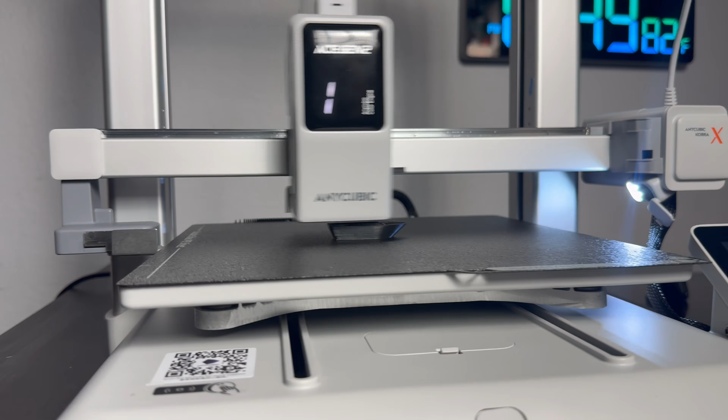A Benchy in 13 minutes, 4-color printing with half the waste and time purging filament, all without an external multicolor system. This printer isn't your ordinary 4-color bed slinger.

This is Anycubic's newest printer, the Kobra X. This printer packs a lot of new features in their new toolhead, the Ace Gen 2.

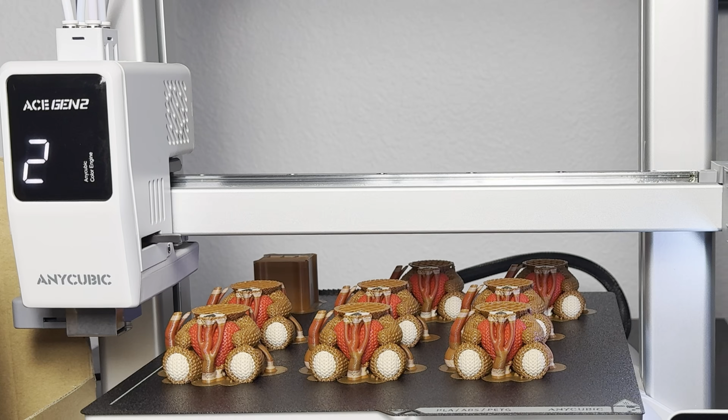Now let's take a look at the features. The big one is the Ace Gen 2 filament changer. Instead of the need for an additional unit for multicolor printing taking up more space in your work area, it's actually built right into the toolhead.

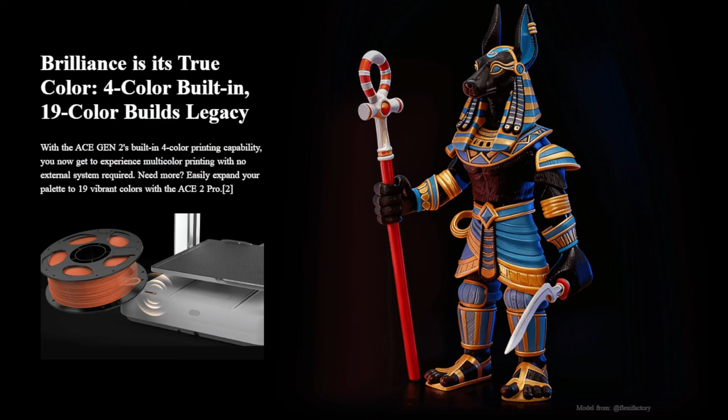Up to 4 filament spools are mounted right on the top here, and it's possible to get up to 19 colors if you connect 4 additional Ace 2 Pros. I don't know if anybody really needs 19 colors, but it's nice to know it's possible.

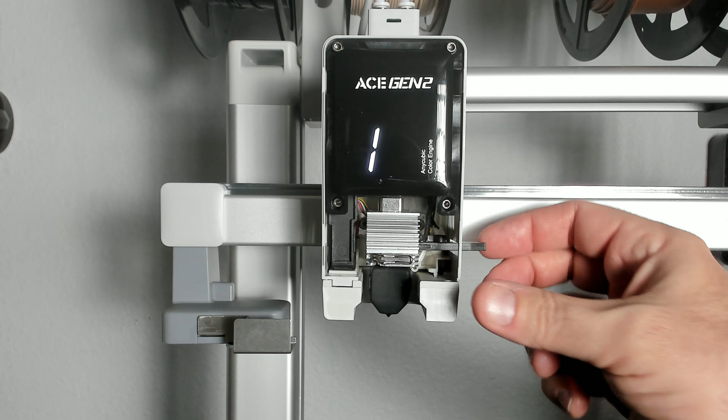Another feature in this toolhead is the short distance between the cutter and the end of the nozzle, only 35 millimeters. Because of this, Anycubic claims there is half the filament waste and half the time for color changes. So I will be testing that compared to my other printers.

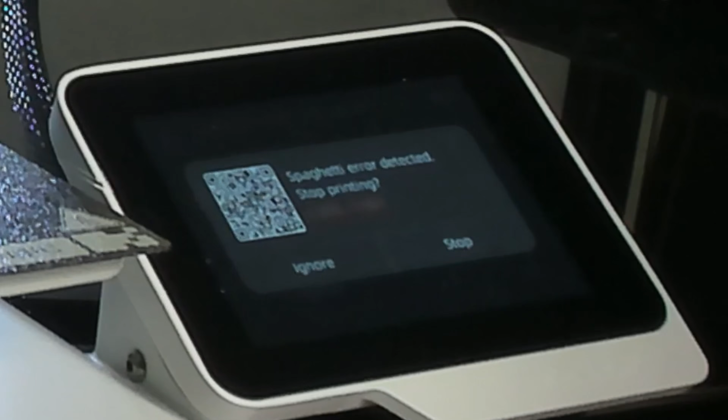The build volume is 260 by 260 by 260 millimeters, so it's slightly bigger than its competitors. It has a top print speed of 600 millimeters a second and a default speed of 300 millimeters a second. You can even print TPU and PLA together in one print. AI error detection with a built-in 720p camera, a quick change nozzle.

This is a whole lot more than I got when I first started 3D printing. Plus, this is for a printer that's under $400. I think it's time to put it together and try it out.

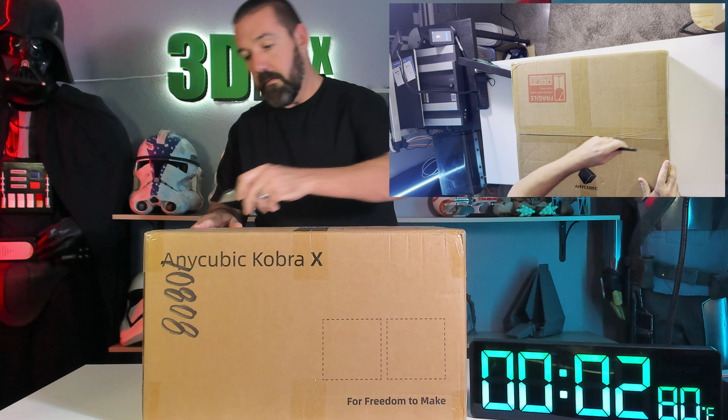I wanted to see how long it really takes to unbox and set up this printer, so I just set up a timer and 2 cameras and got to work. I removed the foam and zip ties from the base and frame. This frame is really easy to install since the 8 screws screw in from the top.

To move the Z-axis, you need to remove the screws and locks on each side of the frame. Then just move the belt under the top of the frame to move the Z-axis up or down.

Next, I tilt the printer and open the cover at the bottom to plug in all the wires. I did end up missing one end of a plug for the Z-axis, so I had to plug it in later. Next is the spool holders.

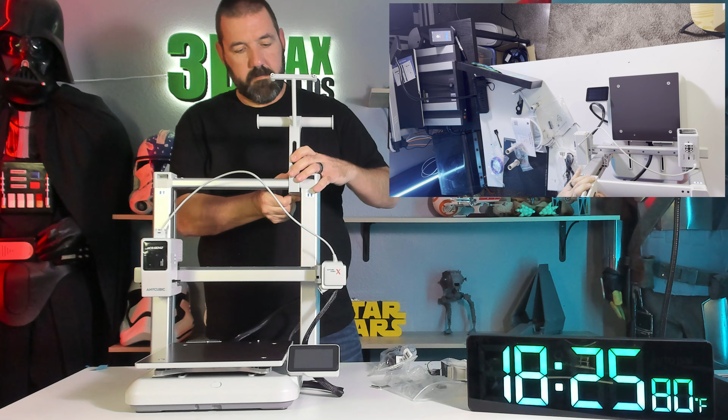I put them together and install them at the top of the frame. They are labeled 1 through 4, so make sure you install them on the correct side. Then I installed the filament tubes. Last, I attached the purge wiper and the print plate.

Overall, it was easy to put together, and it took about 22 minutes to unbox and assemble.

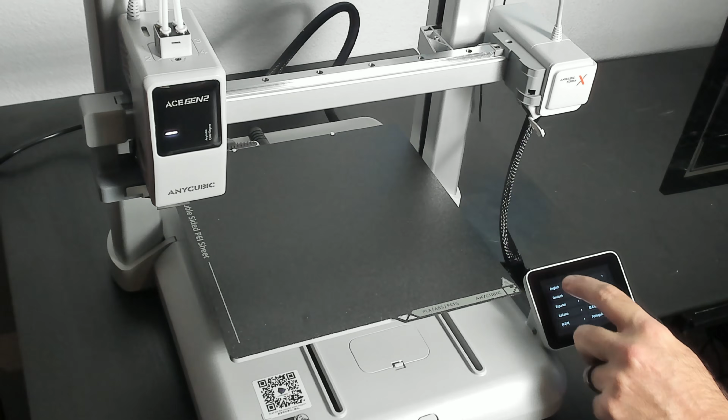After assembling, you want to get the Anycubic app on your phone and the Anycubic slicer on your computer. Then start the initial setup. This process includes calibrating the vibration compensation.

Other printers just test the vibration with the printhead in one position, but this printer tests the vibration with the printhead moving left and right, and with the print bed moving back and forth.

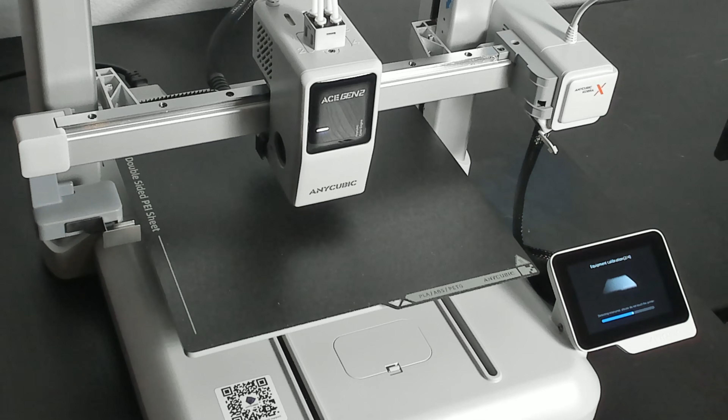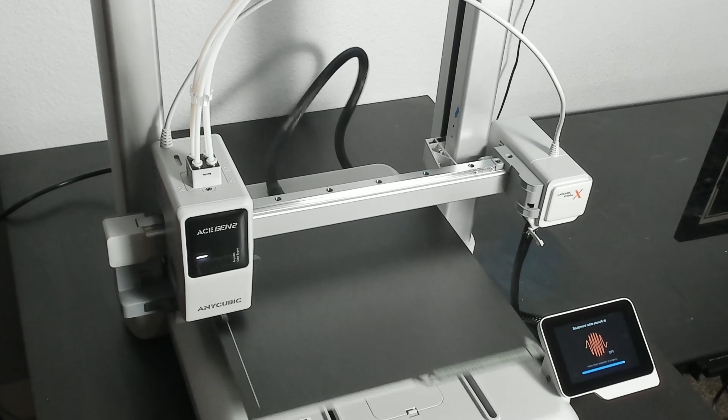It also calibrates for active noise cancellation. It tests the printhead moving left and right at multiple speeds, and the same thing for the print bed. Anycubic states that this printer operates at 48 decibels, so I'll be sure to test that out during one of the prints later in this video.

Now that the setup's complete, I'll go ahead and load some filament for the first print. Just feed the filament through the tube until you hear the notification sound. There are a few files in your printer to get you started.

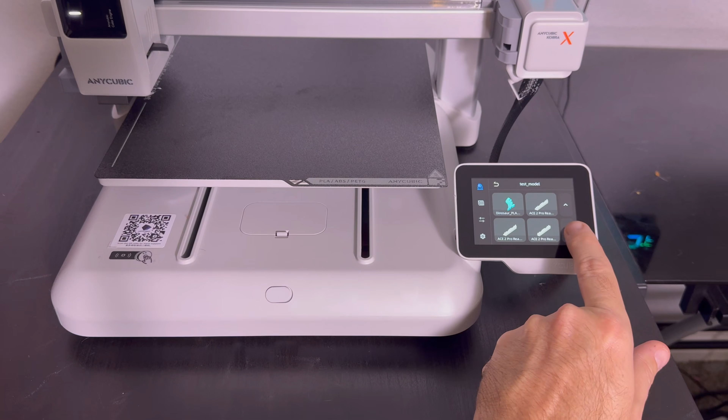One is a first layer print test. Let's try that out first. It prints just one layer over the entire print bed. I have to say that this looks really good.

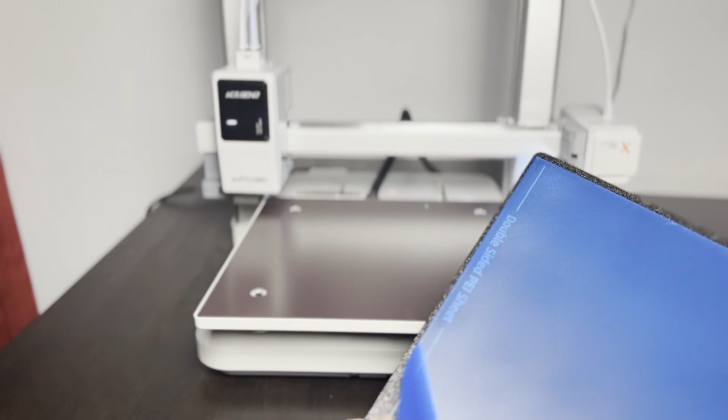I know I wouldn't get anywhere near this quality with the first printer I started with, especially since I had to level it manually. Okay, now let's test the 14-minute Benchy.

When I was testing the Kobra 3 Max, I think it was a 17 or 18-minute Benchy. Well, this one actually finished in just over 13 minutes.

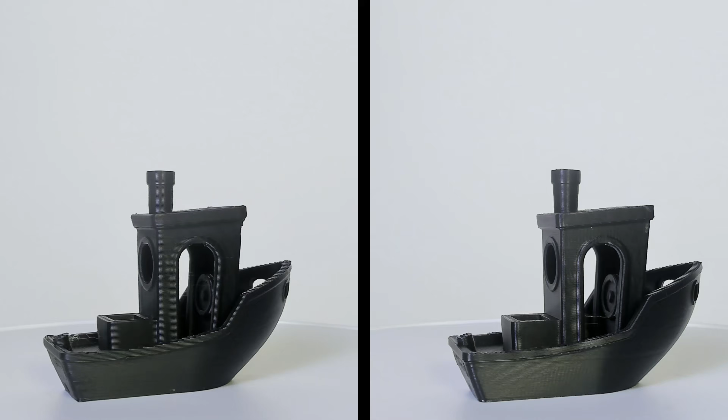I also printed the 40-minute higher quality Benchy. Here you can see the comparison of the two. There is a little bit of stringing and there is a difference in quality, but for just over 13 minutes, I'm actually more impressed with this one.

For printing TPU and PLA together, you need to use the right TPU, which is 68D. I only have TPU 95A.

I wasn't able to get any 68D in time for this video, so that's one feature I wasn't able to test. So now I want to find a 4-color model so I can test out the Ace Gen 2 filament system.

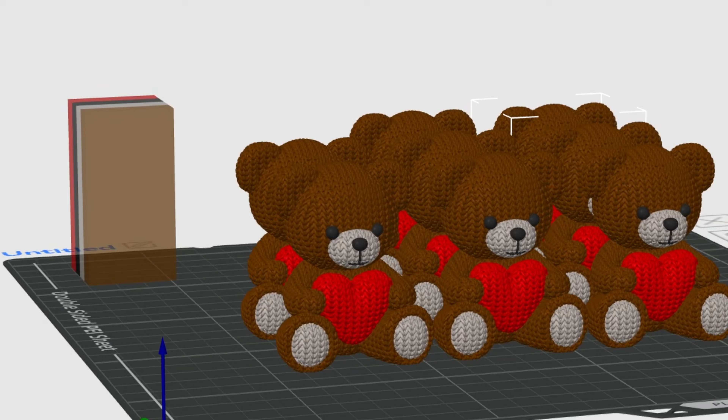I printed these bears at my daughter's request. She wanted them to give out to her friends for Valentine's Day, so that worked out perfectly. I set up the print for 8 bears, added supports, and sliced it.

There will be 308 filament changes. That comes to 3.5 hours for filament purge time, plus 20 hours for the model, which comes to about 24 hours of total time for this print.

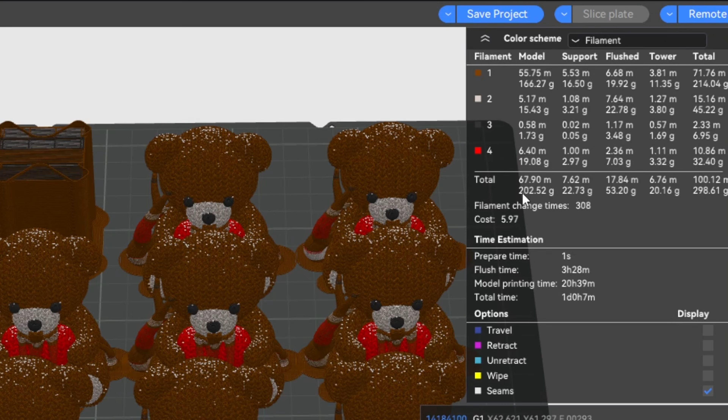For the material, it's about 200 grams for the models, 23 grams for the supports. These amounts would be the same as any other printer, but then you have the purge waste at 53 grams and the prime tower at 20 grams. Overall material is 300 grams for these 8 bears.

I go ahead and start the print. It's about halfway through the print, and so far so good. Now I want to take a look at how long it takes for a filament change.

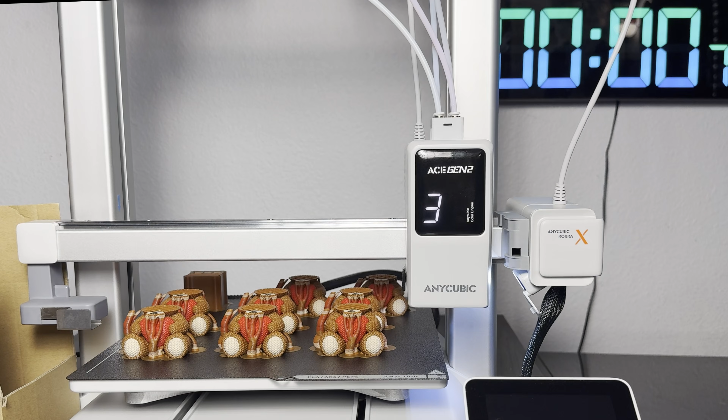With the material change all happening within the toolhead, it saves time since the filament only retracts 30 millimeters as opposed to 160 millimeters on the Kobra 3 toolhead. Plus, with the 35 millimeter distance between the center and the nozzle tip, it cuts down on both material and time to purge. Not including the prime tower, it took 55 seconds to purge and change the filaments.

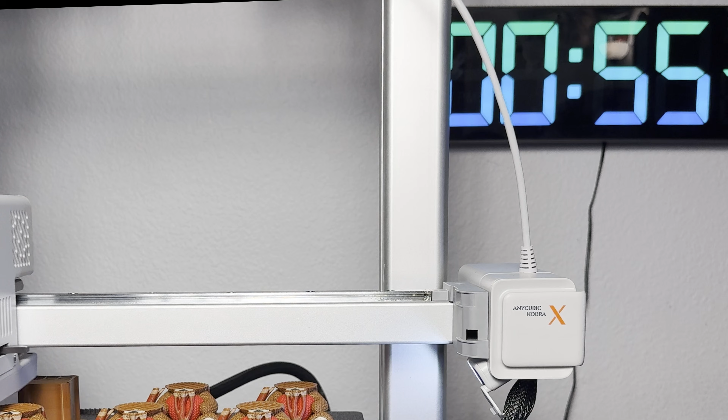I wanted to compare it with a couple of my other printers, so I printed the same bear on each of those, the Kobra 3 Max and the Bambu P1S. On the Kobra 3 Max, it was 1 minute and 18 seconds. And on the P1S, it was 1 minute and 24 seconds. With both comparisons, it comes out to about a 30 to 35% time savings.

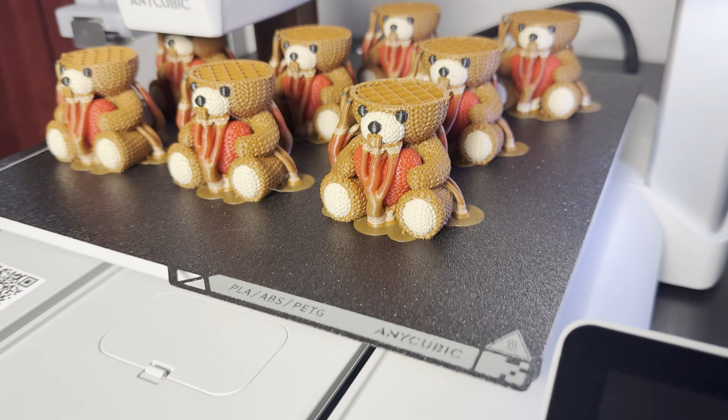Okay, back to the bears. After 24 hours, this print is done.

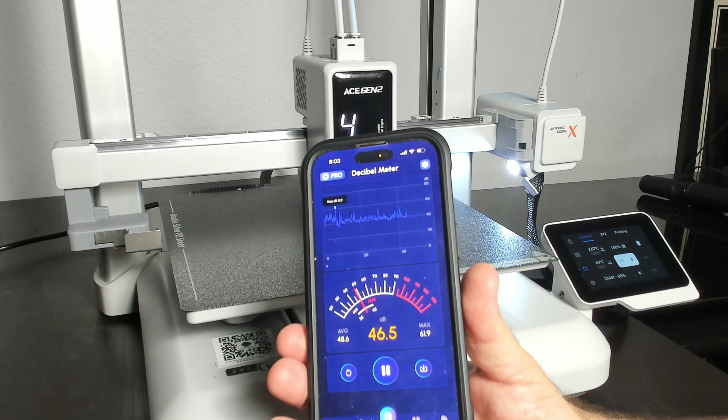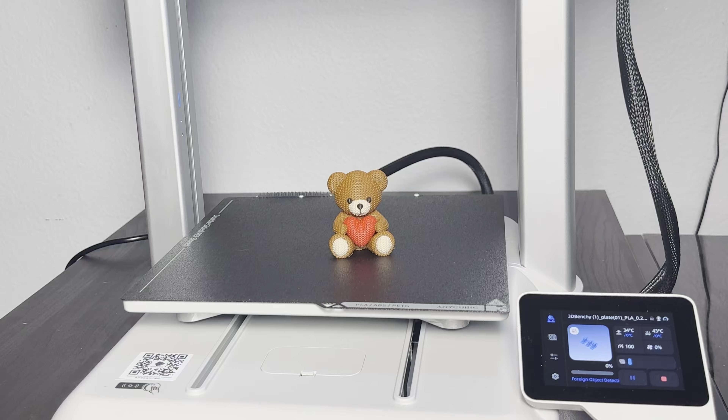There's also the AI detection. There's one setting to detect foreign objects on the build plate. It's a quick double check before a print to make sure you didn't forget to remove the last print.

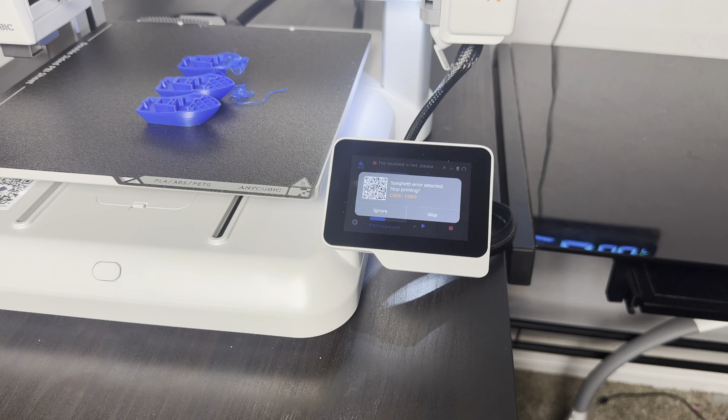I wanted to test the spaghetti detection, but none of my prints failed. So I set up 3 Benchys with the block removed from the third one to force it to fail. It did catch it and pause the print, but I had to set it to the highest sensitivity to do so.

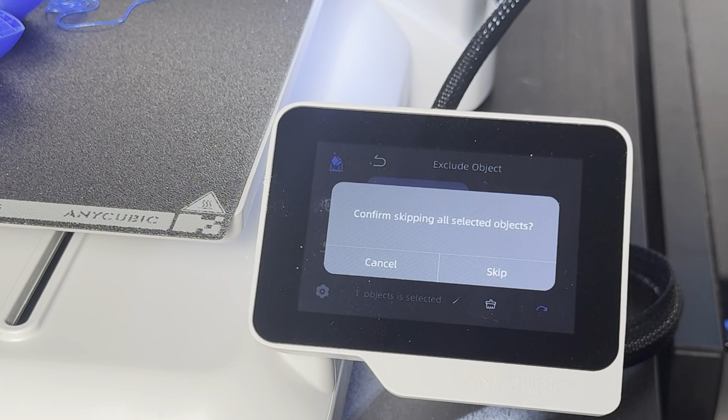Another feature is the ability to stop printing just one or more models for the remainder of the print. You can do that from the slicer, the app, or on the printer screen. This will save you filament and prevent a failed print from coming off the plate and possibly affecting a good model. You can see these two continued as the failed one was stopped.

I've been using the printer for a few weeks now, and I do have to say I was really impressed. The print quality was good, it was easy to use, and it did everything it was supposed to do. Plus, with the Ace Gen 2 saving both time and filament, this printer really stands out over similar priced printers. I think it's a great printer for someone who's new to 3D printing and is just getting started, or maybe someone who wants to do a lot of multicolor prints on a budget.